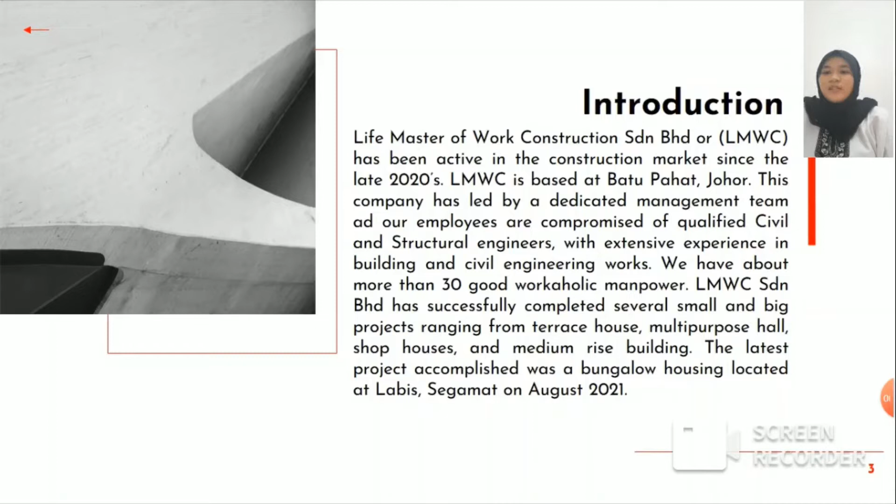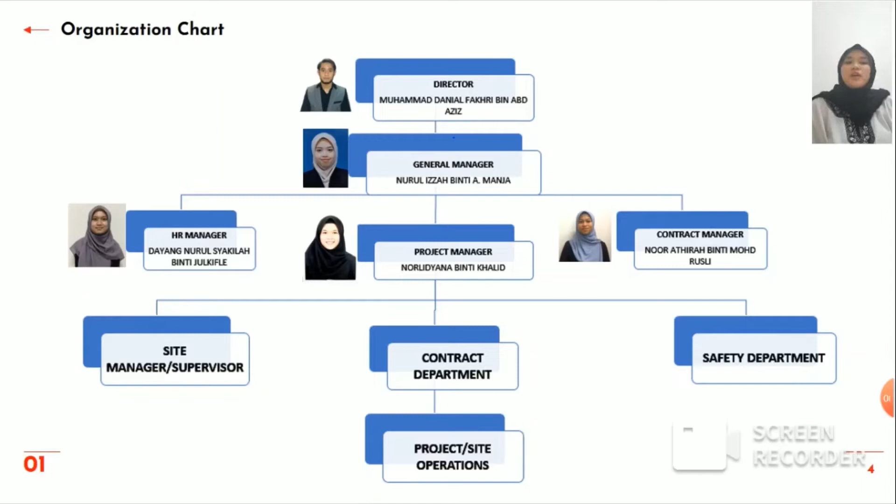Here is our organization chart. Our director, Muhammad Danial Fakhri, our general manager, Nurul Izzah, our HR manager, Dayang Nurul Syakilah, our contract manager, Noor Athirah, the project manager, which is myself, Norlidyana, and under me there is contract department, safety department, site manager and supervisor. Under contract department, there is project site operations.

Assalamualaikum warahmatullahi wabarakatuh. My name is Dayang Nurul Syakilah binti Julkifle and I will be presenting about the drawing. So the first drawing is the floor plan. We have 3 floors, the ground floor, the first floor, and the roof floor. The building itself comes with the width of 6.096 meters. The length of the building is 18.407 meters, and the height of the building from the upper foundation to the roof is 7.5 meters.

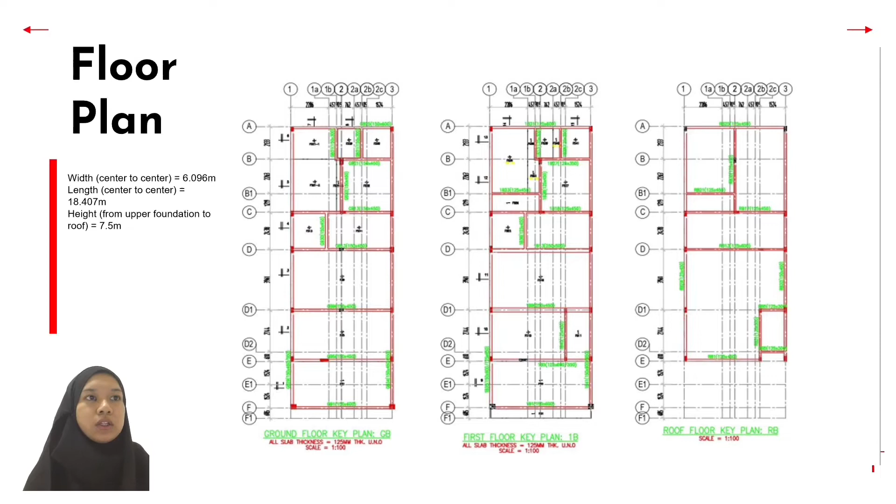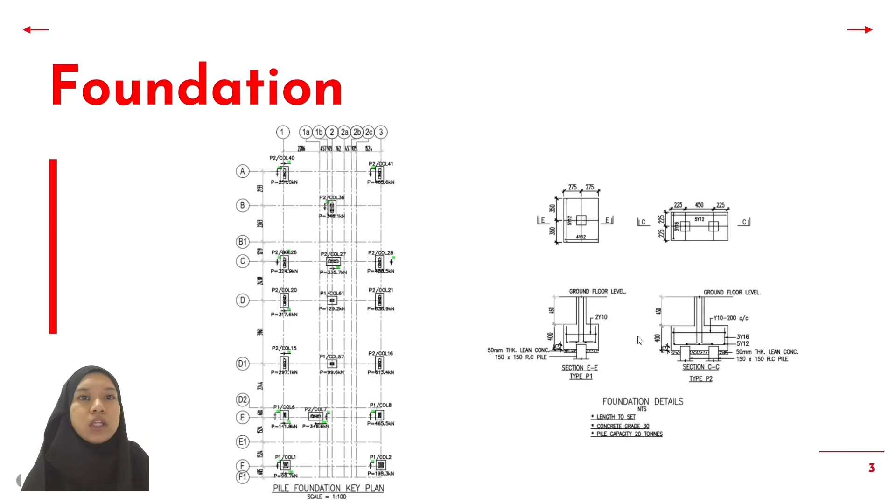Thank you. Assalamualaikum. So I'm going to present to you our taking off. The term taking off refers to the process of identifying elements of construction works that can be measured and priced. This is necessary to produce bills of quantities and requires that the design is complete and a specification has been prepared. There are 3 elements that are important in doing taking off.

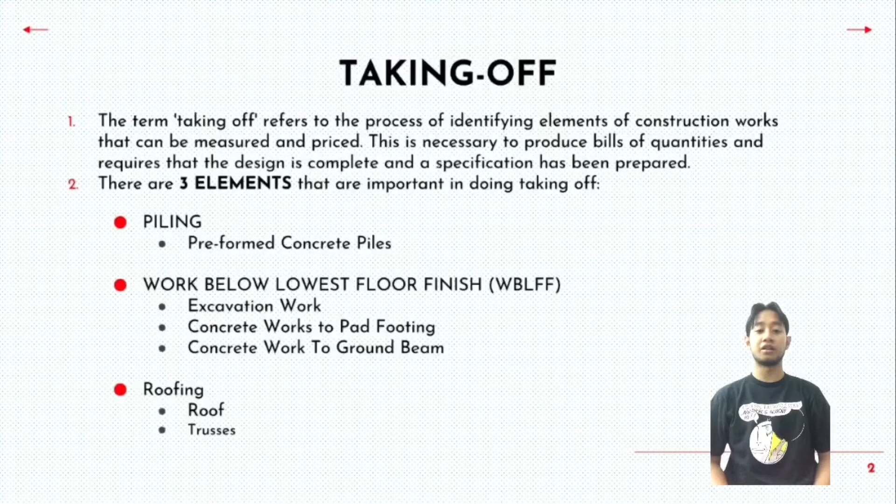First, piling, more specifically preformed concrete piles. Second, work below lowest floor finish or WBLFF, more specifically excavation work, concrete works to pad footing, and concrete work to ground beam. And the last one is roofing, more specifically roof and trusses.

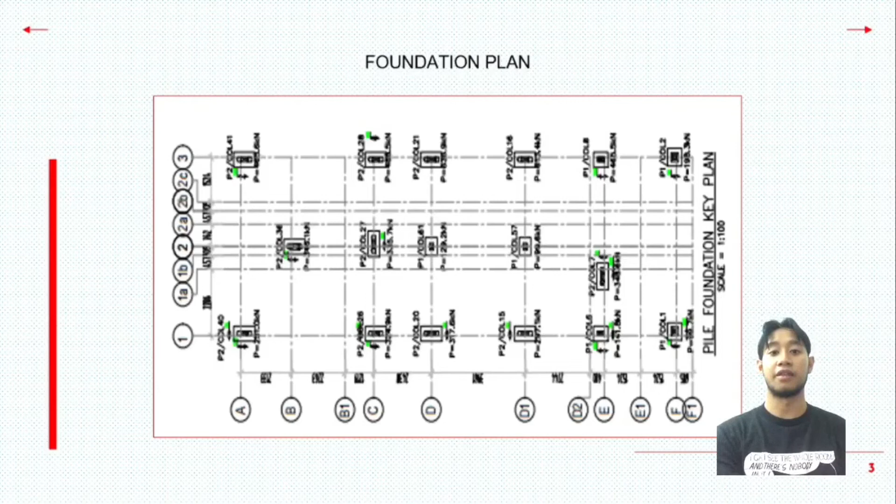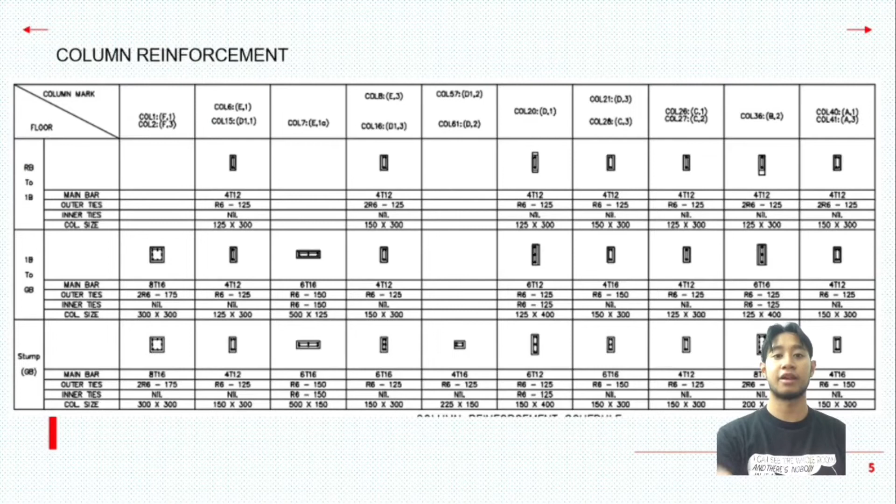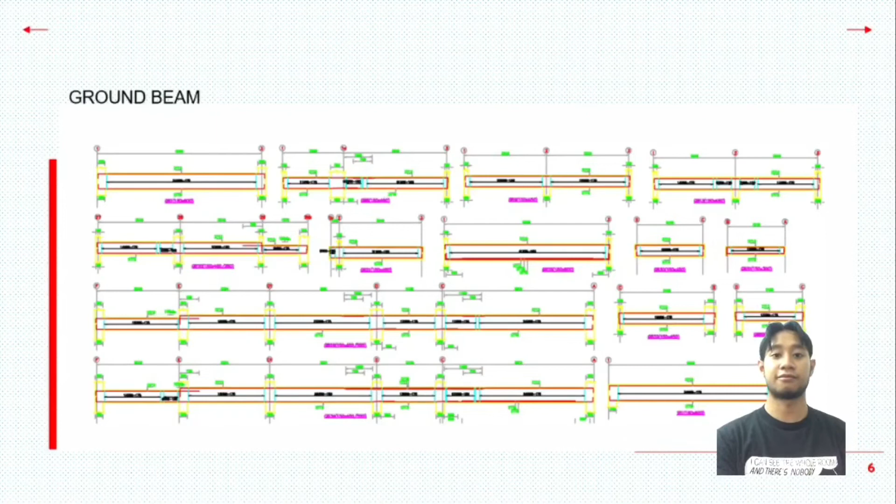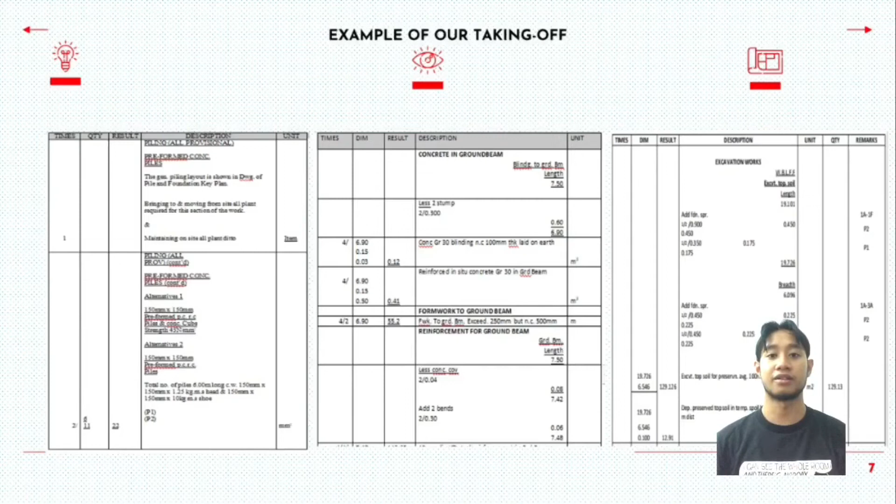And the last one, these are our examples of taking off. As you can see, there are 3 examples. We screenshot them from our taking offs.

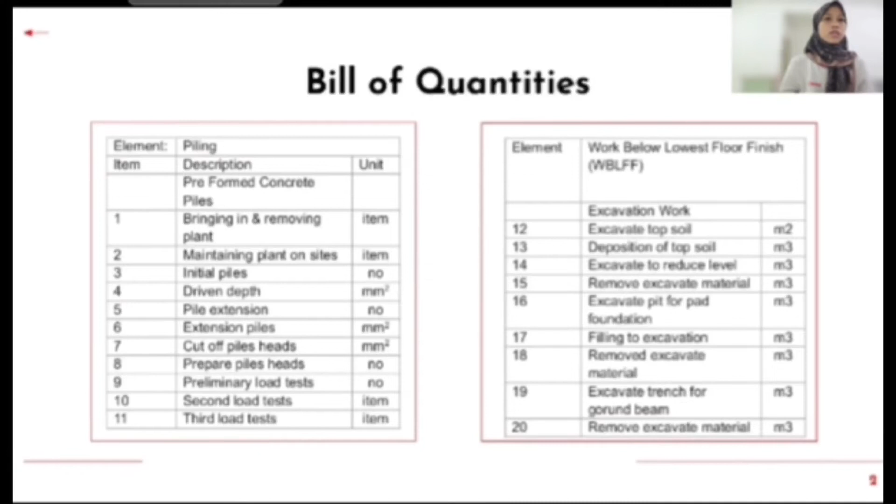I am Atira binti Muhammad Rusli, matric number CF 2095. Today I am going to present on BQ and build-up rate for our project. I start with bill of quantity. There are 3 main elements that have to be calculated, which are piling, work below lowest floor finish, and roof. For piling, we have to determine the driven depth, pile extension and load test on the pile. While for work below lowest floor finish, we have to calculate excavation work, pad footing, reinforcement, and so on, followed by the roof.

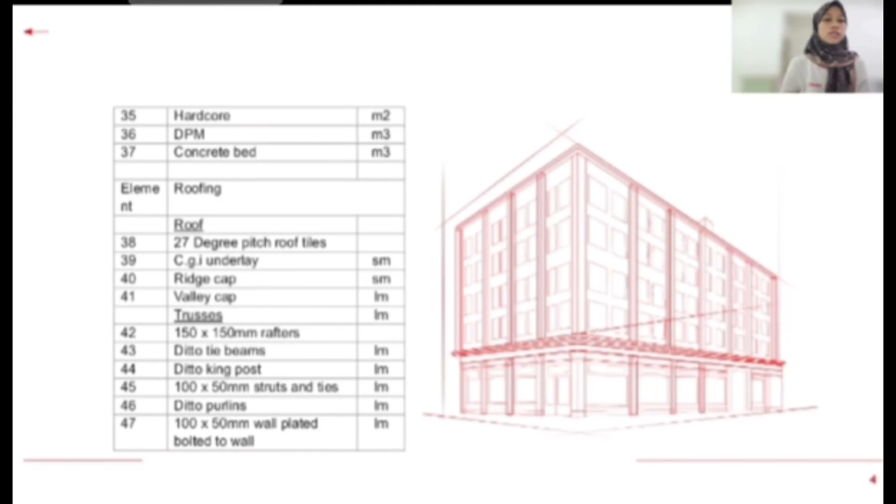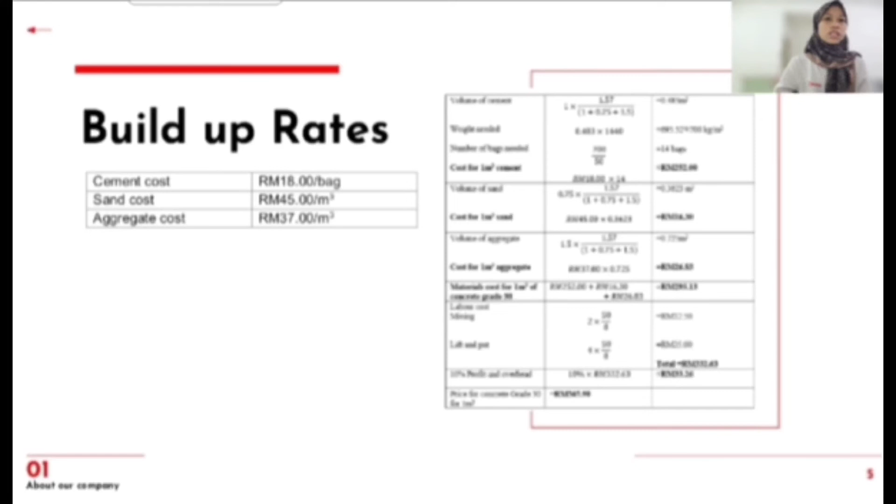Next is the build-up rate. The cost of cement is RM18 per bag, and the cost for sand and aggregate is RM45 and RM37 per meter cube respectively. As you can see, here is the example of the calculation. From the calculation, we got the total price for concrete grade 30 is RM365.90. I think that's all from me. I will pass to my next group member. Thank you.

And for the LAD, from CIMB bank, the BLR rate is 5.85% times the contract sum and divided by 365 days, because we want the LAD per day. So the total is RM20.82. So that's all from me. Thank you.